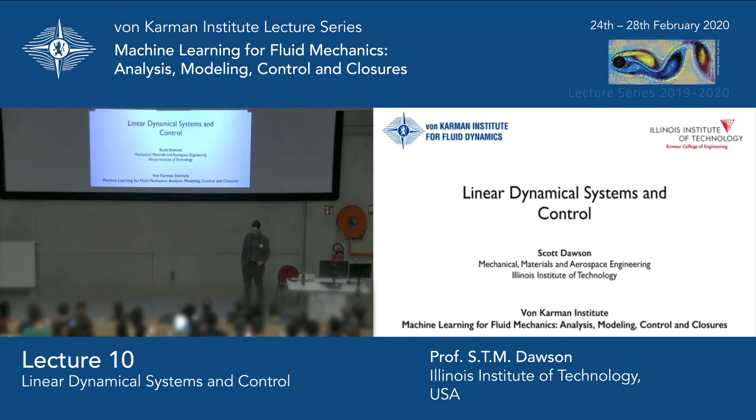So I'm going to be talking about really some relatively simple ideas in terms of control of linear systems. So this is, I guess, taking a step back in complexity from some of the things, for example, that Peter was talking about in terms of optimizing nonlinear systems. But we're really going to focus on the control part here. And so in some sense, this is an abbreviated first course in control theory, or elements thereof. And so really what we're trying to do here is start with some system, which might be linear, or it might be non-linear, but perhaps by looking at it in a linear way, we can still make some progress in terms of working out how to manipulate it to whatever objective we have, using feedback control.

And so to jump forward, what we're going to be going through, we're going to use a relatively simple model as an example to drive talking about these ideas. We're going to be looking at proportional, PID control, pole placement, and LQR. And then I might talk a little bit about a few other methods. The other thing to note is that I'll be relatively frequently switching between the time and frequency domain.

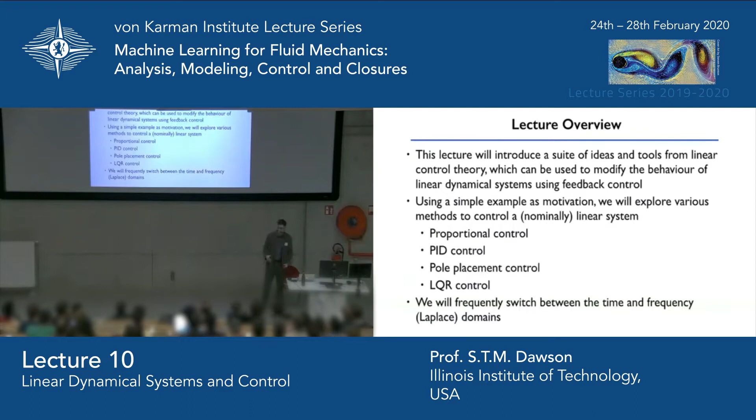So if you think back to some of the material yesterday, we're touching upon some of these ideas, about the equivalence between a linear state space system or a system in the time domain, which perhaps can be also characterized by its impulse response, and then the equivalent system in the frequency or Laplace domain, which can be characterized by, say, the response to forcing at given frequencies. And it turns out that each of these ways of characterizing and understanding a system have their own advantages, depending on exactly what we're looking at.

So let's jump straight ahead to our model problem. So we're not being particularly creative here, looking at an example that we've considered in a few lectures so far, which is just flow past a cylinder. We're at a Reynolds number of 60, so we're unstable, but only just unstable. It takes a while if we start near the unstable equilibrium to eventually have a disturbance that grows, and eventually, because this is a nonlinear system, we end up on a limit cycle.

And so we're going to be using this system as motivation, in the sense that I'll take data and use that to identify a linear model. But then from there, we're just going to be looking at that linear model. So going back and actually trying to control the full system will be beyond the scope of this work, though I will talk about some other works that have used these ideas in linear controls to control actual fluid systems.

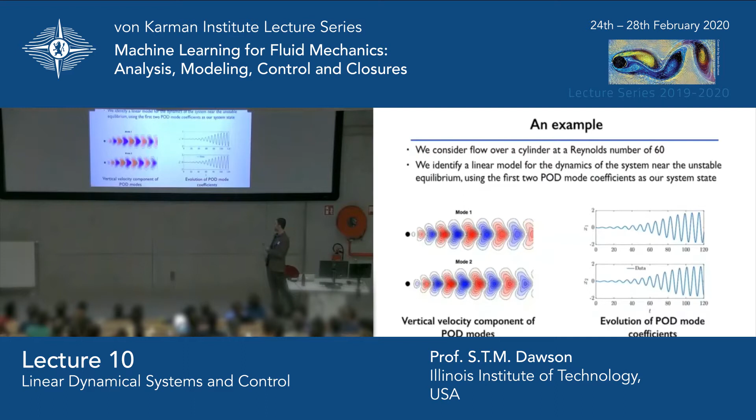So what do we do? So we can take some data, we can use modal analysis techniques such as POD to get out the dominant structures. And for this system, it's pretty simple. There's really only one dominant unstable mode. And so the POD coefficients identify that. And then what we do is we look at the dynamics of those first two modes in a short time window near the unstable equilibrium, with the thought being that the system is approximately linear here, and we identify a linear model in this regime.

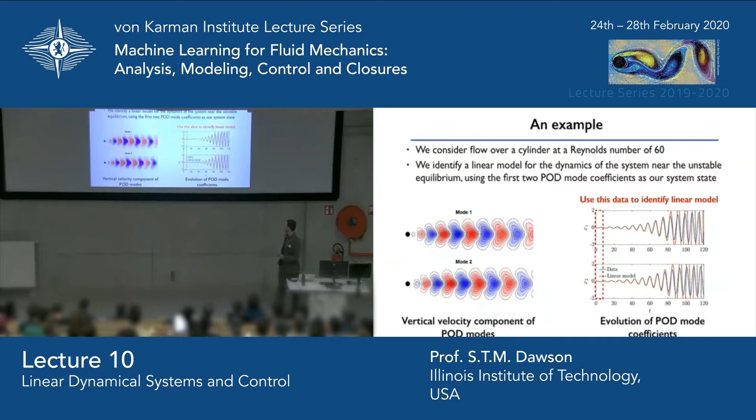Right, so this is actually what I wanted to show, where we have a linear system identified here, and then things sort of remain relatively linear, at least in terms of the evolution of these POD coefficients, for a fair while longer. And that's kind of good to know in practice if you wanted to try and implement a method like this, you might be able to argue that the basin of attraction or the basin where your linearity is valid is relatively large.

So I'm going to skip through the details regarding the identification of the dynamics, but essentially we can use our favorite linear modeling method. It could be something related to dynamic mode decomposition that we learnt about a couple of days ago, or it could be something that we do either in the time or the frequency domain. But at the end of the day, we get a linear state space system where the dynamics are governed by this A matrix. And perhaps unsurprisingly, we find that it's unstable, which we observed from looking at what happens to the system over time.

But what we see is we have two eigenvalues in the right half plane, so here I'm looking at eigenvalues rather than complex frequencies. So everything in the right half plane is unstable and the left half plane is stable. In other words, anything with a positive real component is unstable. So this is going to be our starting point for our analysis. We have a linear system that looks like this, and it's two-dimensional, so it's about as simple as one could get.

Okay. So we don't want to change slides. Let's try this one more time. Okay. Hopefully I don't have to do that between every slide.

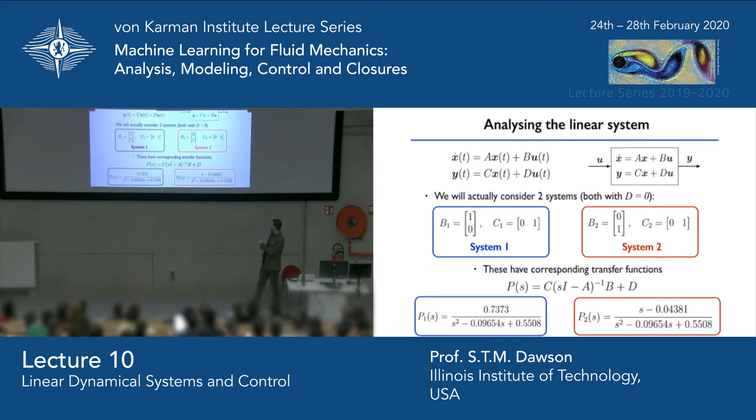And this operator here actually came up in Peter's last talk, where we were looking at the response of a system to a given input, where the input here goes through the B matrix and the output goes via the C matrix, but it's the same sort of idea. So anyway, we get these two transfer functions. And perhaps unsurprisingly, because we have the same underlying dynamics, they have the same denominator, which indicates that they have the same poles or eigenvalues. However, they have different numerators. So in one case, we have a zero, that is a solution to the numerator being equal to 0, and the other one doesn't.

It's worth noting here that this denominator is a quadratic, and one way of thinking about these dynamics is the transfer function ends up being a similar form to what you get with a spring mass damper system, except for the fact that we have this negative term which corresponds to a negative damping coefficient. And that's consistent with the system being unstable. So that is, any initial condition will grow in time as well as oscillate rather than decaying in time. Okay, so we have different ways to characterize this linear system.

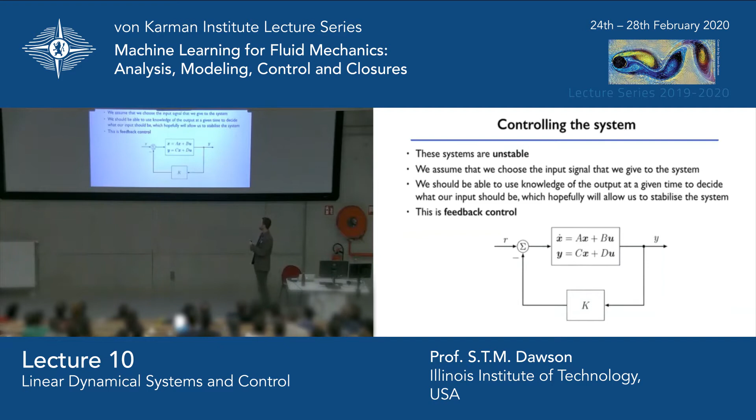And so how we do this is we want to somehow make our input be dependent on what our output is, or use real-time information about our output in order to determine what our input should be to achieve some desired control objective. And so really this idea is what underlies feedback control. So that is, we have this loop where the output is used to compute the input that hopefully drives the system to the output that you want.

And so really what a lot of this lecture is going to be doing is studying what this K is, which is going to be how we relate our output to our input, basically. So for simplicity, we can choose R is equal to 0. I should have maybe written this explicitly, but what this input ends up being is R minus whatever comes through this feedback loop. So R minus K multiplied by Y, which is this here.

Or alternatively, since we know that Y is equal to Cx, remembering that D is equal to 0, our input to our system is now related to the state of our system by this KCx term. Now, I haven't said anything about what K could be. Most simply, it could just be a constant. But more generally, it could be itself, say, a linear system with its own internal dynamics that could be designed, presumably in some way, to give desired closed-loop performance.

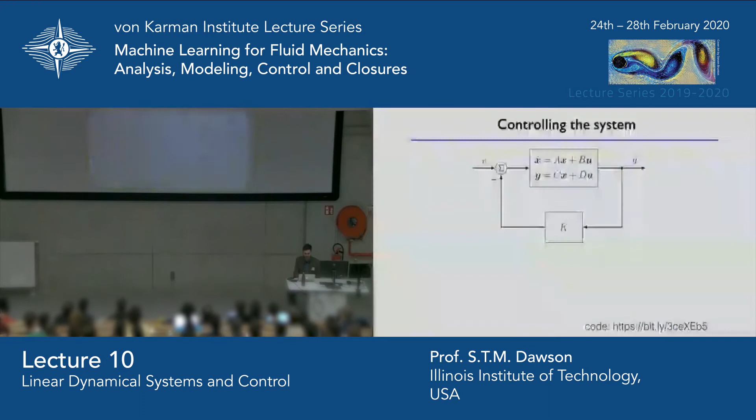But what I want to do is to go back and see if we could... and as I was talking about before, we have closed loop dynamics such that the input to our system is related to the output by this controller K.

And so what that means is that our closed loop dynamics, if we go back to the state equation of our dynamical system, we can write everything in terms of X and see that we have our closed loop dynamics, which are going to be governed by this matrix, which is our original matrix, but modified by this BKC term. And so by looking at the eigenvalues of this matrix, which we should be able to know or predict for a given K, we can compute them, we should be able to say whether or not our system is stable.

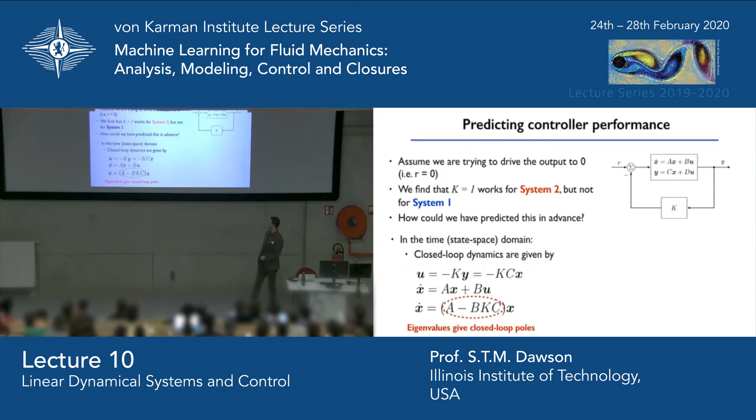Or equivalently, in the Laplace domain, the closed loop dynamics for our system, where P is our plant or our original open loop system, are going to be given by this. Actually, it should be P. There shouldn't be a K there for this configuration. But that's a minor thing. The important thing is that our closed loop poles are going to be solutions to the denominator of our transfer function being equal to 0.

Okay, so let's look at things in a little bit more of a general way. So in general, if we have our system being given by a transfer function of this form, and both of the systems that we're looking at are of this form, then this is sufficiently simple such that we can explicitly compute what our closed loop poles are going to be.

So all that we need to do is basically express this equation, make this equation equal to 0, and then rearrange things a little bit, and we find that we just have a quadratic equation that tells us what our poles are going to be as a function of our controller K. And again, we're looking at a general system of which we have 2 examples, which are those 2 systems that we're going to be looking at.

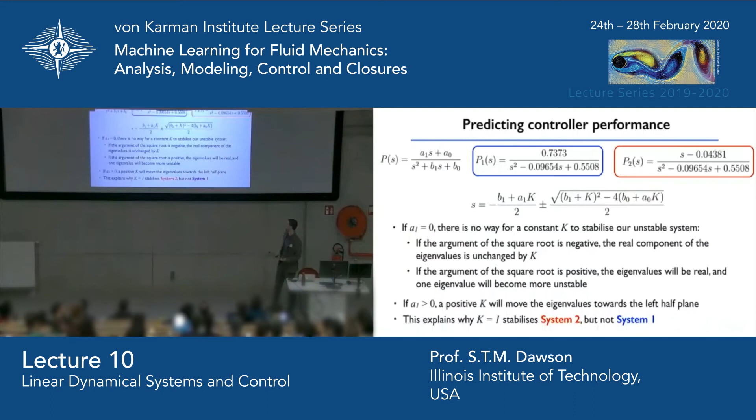Okay, so again, to summarize, for a positive A1, which is what we had for this second system, a positive K will tend to move the eigenvalues towards the left half plane, so to stabilize it, which is why we stabilize system 2, but not system 1. Okay, so that is nice. It turns out that it's relatively easy to understand what we had observed empirically. But now one question that we can ask is, well, how do we stabilize this system?

So there are obviously a lot of things that we can do, and eventually we'll introduce a lot more theory that will allow us to perhaps do this in more systematic ways. But one thing that we could do is actually choose a controller that makes system 1 kind of look more like the controlled version of system 2. So that is, if we choose a controller that basically replaces this numerator with this numerator, then I'm actually going to get a system that should have the same poles. So in other words, I get the same 1 plus PK equals 0 equation for system 1 if I choose a controller that looks like this.

And again, this is not necessarily the smartest thing to do, but what we can do without developing any other theory is use the fact that we know that a K equals 1 proportional controller works for a similar system to find what can be thought of as an equivalent controller to stabilize our system 1, which proved to be a little bit trickier to control.

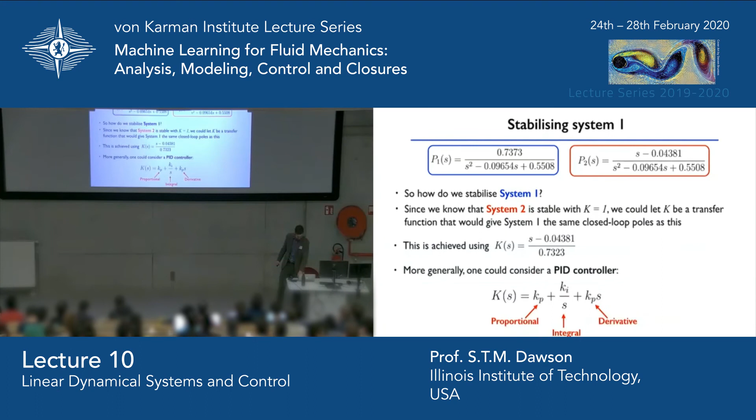And again, I could go back to the notebook and start playing around with these things, but in the interest of time, we'll keep pushing through. But feel free to play around with that yourselves. Okay, but more generally, if I have, say, a simple controller, I might want to be able to predict something about the performance or the stability characteristics of my closed loop system.

Now, in the example that I showed, it was actually relatively simple to, from first principles, determine where my closed loop poles were. But that really relied on me only having a two-dimensional system which had a quadratic that I needed to solve for the poles, and I could use my quadratic formula, and so everything works out nicely. More generally, though, if we had a higher order system, so that is if the denominator of our transfer function was a higher order polynomial, then it quickly becomes intractable to solve.

And so that motivates the design of tools that can help us make these predictions without having to do the precise math. And so that motivates the root locus plot. And so what this is, it's a plot of all of the closed loop poles that you get that are parameterized by some constant within some controller.

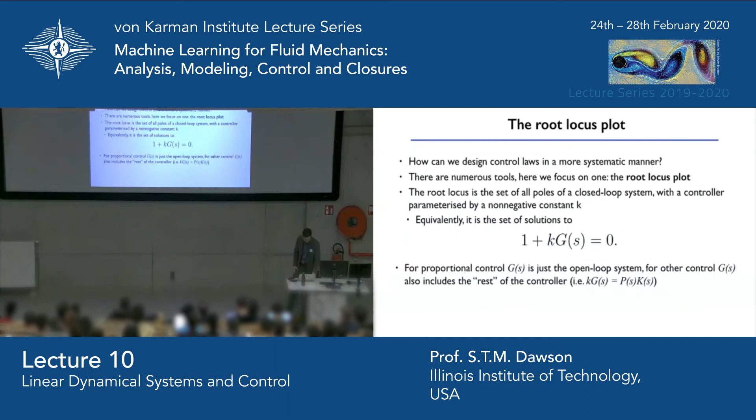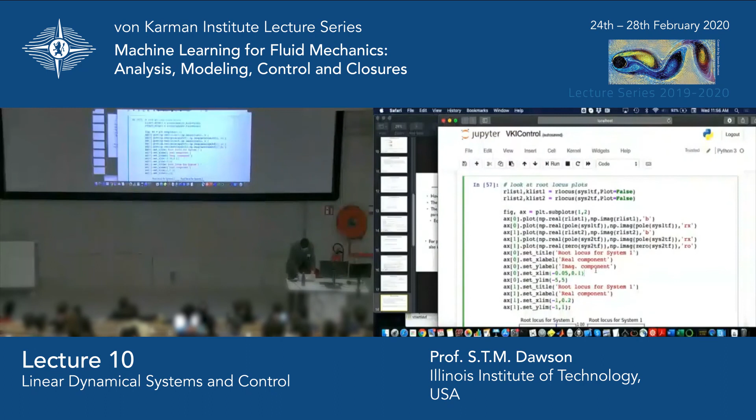And this, I think, will make more sense when we go through an example. So once again, it's sort of a one-liner in Python or MATLAB. We have an inbuilt rlocus command. And it will either output the plot itself automatically if you have plot equals true. I think in Python in particular, it's kind of nice to do things a little bit more manually, at the expense of having more lines of code.

But basically what I'm showing here are the root locus plots for proportional control for my two systems. So again, these are systems with the same A matrix, but different B and C matrix pairs. And so we see for system 1, remember this is the system that was still unstable when we used our simple k equals 1 proportional feedback. We see that the eigenvalues are along these blue lines, which we observe never cross into the left half plane. So that's consistent.

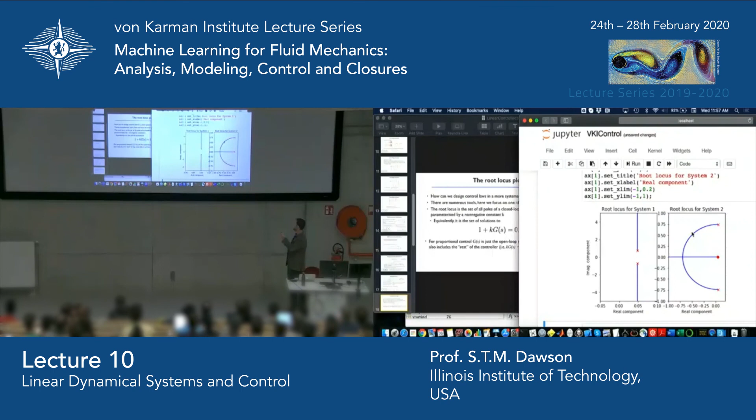Conversely, sorry, this should be system 2, not system 1, but I can change that. We see here that as our controller gain changes, our poles, which originally were at these red crosses, move towards the left half plane. Again, consistent with what we had found empirically. Okay. So now the question is, do we understand, or can we predict why these plots look like this? And that's what I'm going to do next.

So it turns out that root locus plots can be constructed or approximated using a few simple rules. So to start with, root locus always starts at the open loop poles, or the poles of G of s, which in our case for proportional control is just the open loop poles of our system. So that is why these scales are different, but one end of our root locus, which corresponds to k equals 0, is at these open loop poles.

Secondly, a point on the real axis is included in the root locus if there's an odd total number of poles and zeros to the right of it. And here's where the fact that our system 2 has a zero, but our system 1 does not, starts to have an impact. Because the total number of poles and zeros for our system 2 is 3, which is odd. So that means everywhere to the left of all three of these is going to be included in the root locus. So there is a k value such that any point on this blue-colored portion of the real axis is an eigenvalue for our system.